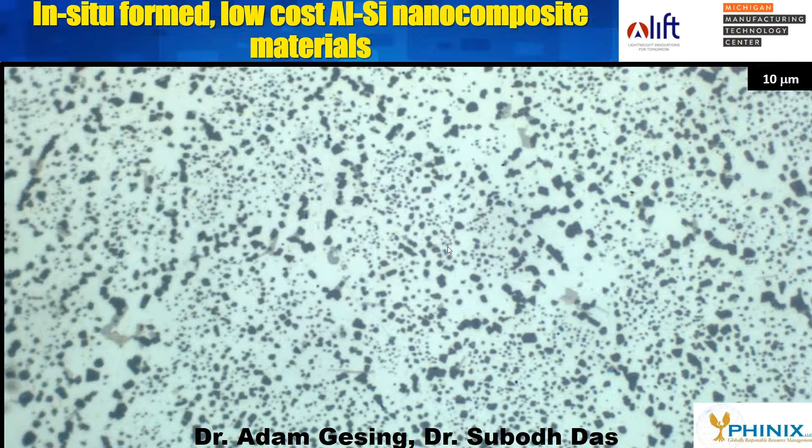Artificial aging-strengthened aluminum superalloys. This new light metal composite is net-shaped form by high-pressure die casting with the potential to reduce mass by 40% and to reduce cost by 20%.

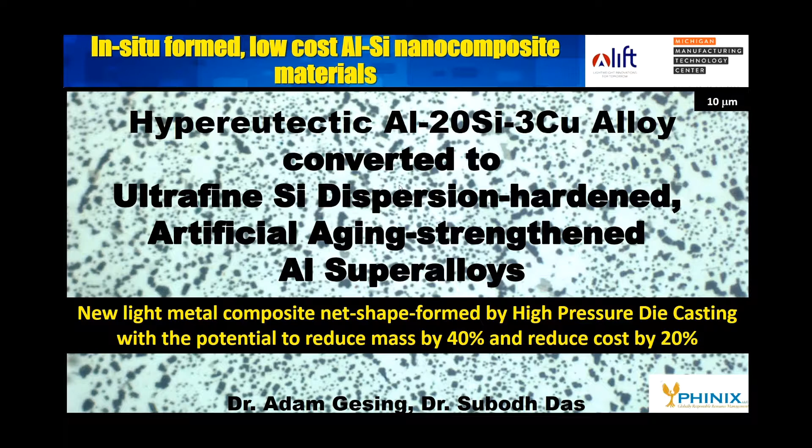A little bit of background: the aluminum silicon alloys are the bread and butter of the aluminum foundry industry and are being cast at an annual rate of over 2 million tons per year in North America for use mainly in transportation. However, the coarse microstructure of these alloys limits their specific mechanical properties and their potential for vehicle lightweighting.

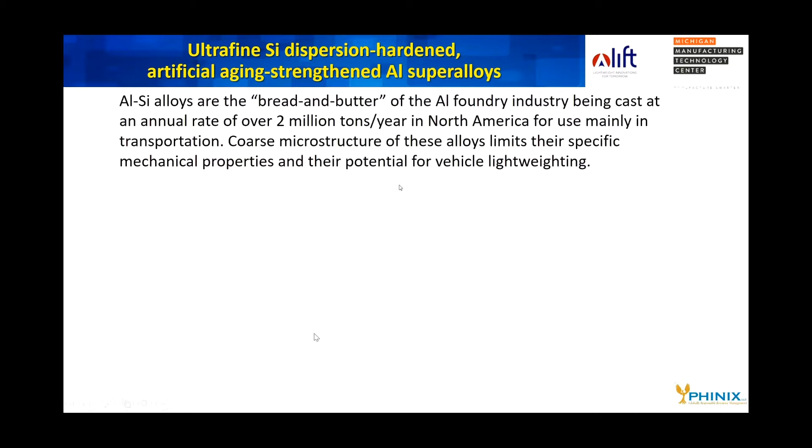A new development of a cast aluminum alloy produced in situ formed nanocomposites of up to 25 volume% of submicron equiaxed silicon particles in an aluminum matrix that can be left ductile or can be reinforced by nanoscale spinodal precipitates.

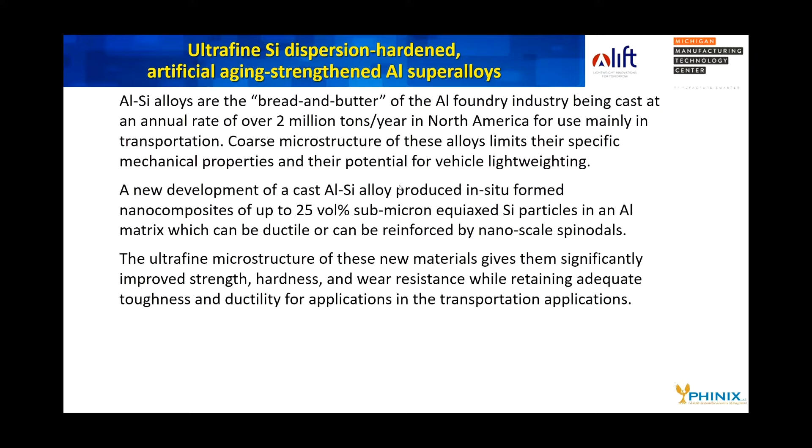The ultrafine microstructures of these new materials give them significantly improved strength, hardness, and wear resistance, while retaining adequate toughness and ductility for application in transportation. These materials are produced by conventional casting techniques, including continuous strip casting and high-pressure die casting.

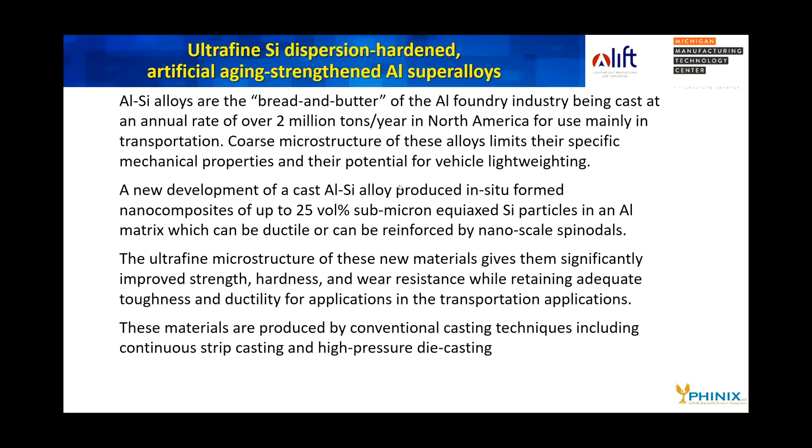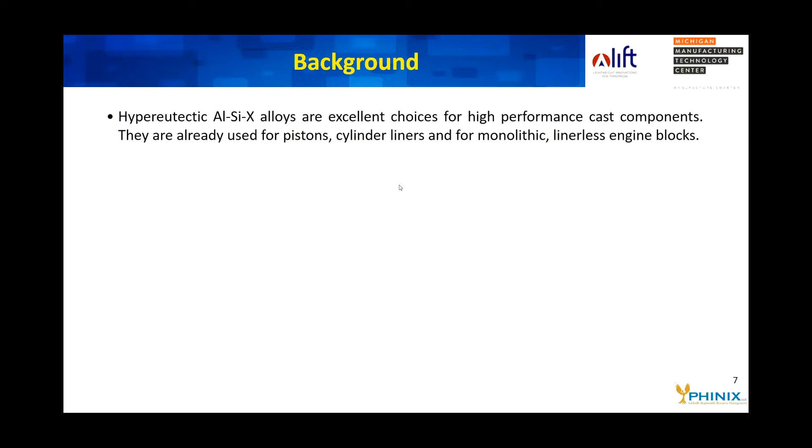Some background: the hypereutectic aluminum silicon alloys with other additives are excellent choices for high-performance cast components. They are already used for pistons, cylinder liners, and for monolithic linerless engine blocks. The high silicon minimizes the thermal expansion coefficient, and improves the alloy's thermal conductivity by almost 3 times in comparison with cast iron.

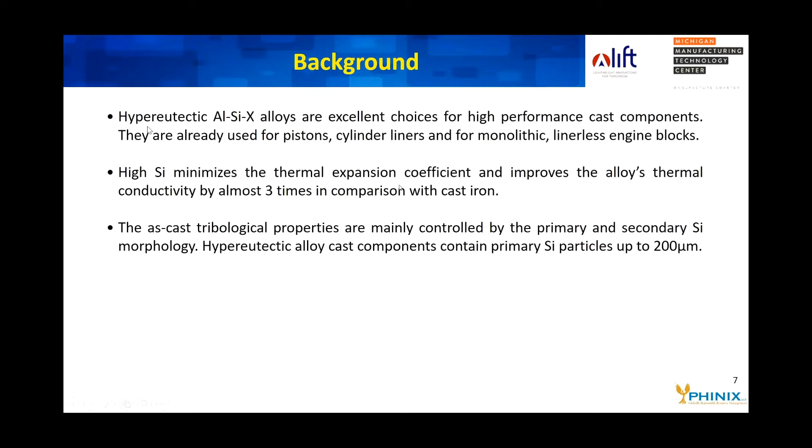As-cast tribological properties are mainly controlled by primary and secondary silicon morphology, but the hypereutectic cast components on the market now contain primary particles of up to 200 microns, and agglomerations of those particles lead to critical flaws that limit their application for strength-critical applications. The industry demands significant reduction of primary and secondary silicon size for improvement of the component's mechanical properties.

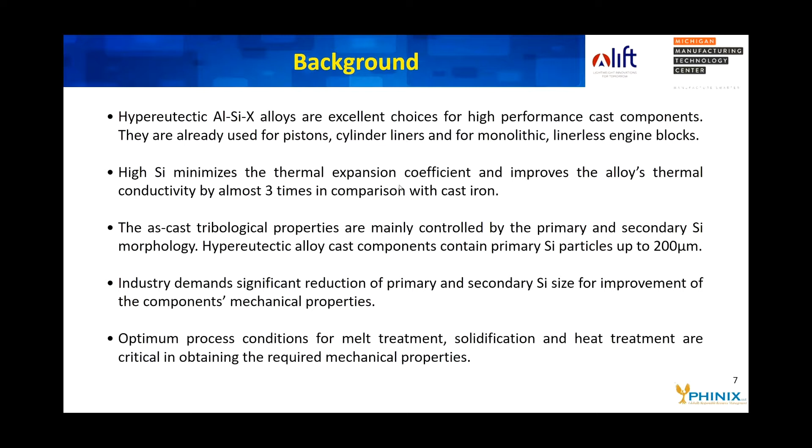Optimum process conditions for melt treatment, solidification, and heat treatment are critical in obtaining the required mechanical properties. An example of the use of such a hypereutectic alloy is A390 alloy used in the engine block of a Yamaha Majesty motorcycle. It is formed by high pressure die casting, in which the metal is poured into a dosing hole of a shot sleeve and then injected into the die cavity by the injection plunger.

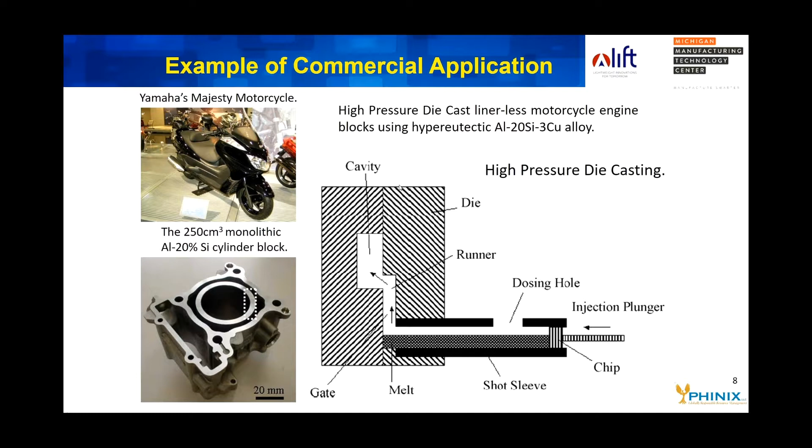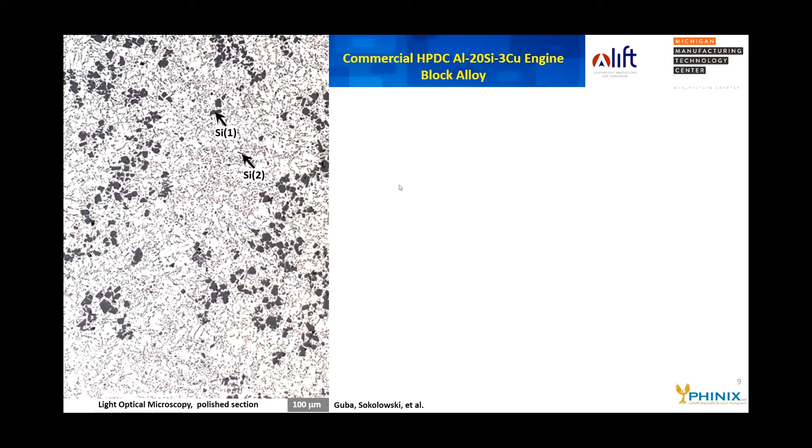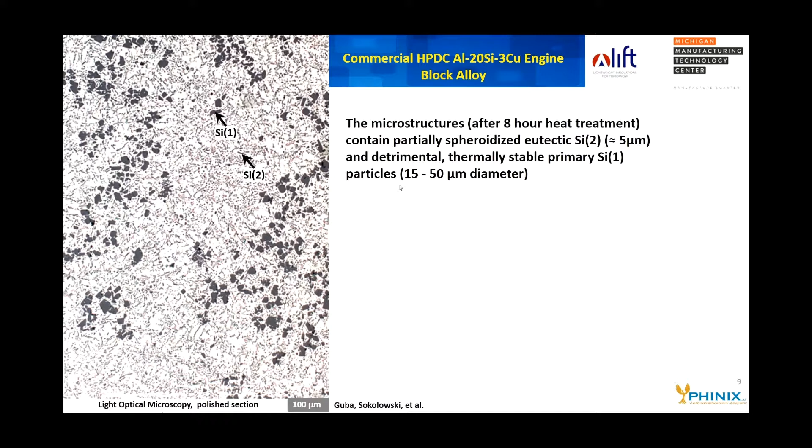The microstructure that results is shown here. It is already heat treated, and it is dominated by large primary silicon particles and partially spheroidized secondary silicon particles. The secondary silicon particles are about 5 microns diameter, and the primary particles are 15 to 50 microns diameter, but their non-uniform distribution creates critical flaws that are over a millimeter, and that limits the fracture strength of such a commercial alloy.

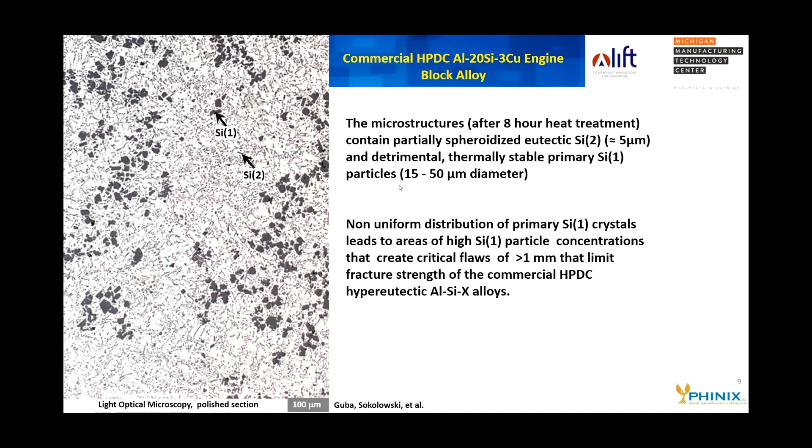There has been a lot of study on how to modify this primary silicon distribution and size, and here we show the effect of the melt holding temperature and the cooling rate, average solidification rate, on that distribution. The slowly cooled material at top left, at 735 degrees and 1.3 degrees a second, contains large primary silicons and large plates of secondary silicon, and those plates are 250 to 500 microns in diameter and have a thickness of about 5 to 10 microns.

Both the primary and secondary silicons can form an interconnected network, and that helps crack propagation through the material. The commercial engine block we're discussing has a microstructure that lies at a reasonably high melt temperature and die casting cooling rate of about 35 degrees, or average solidification rate of about 35 degrees a second.

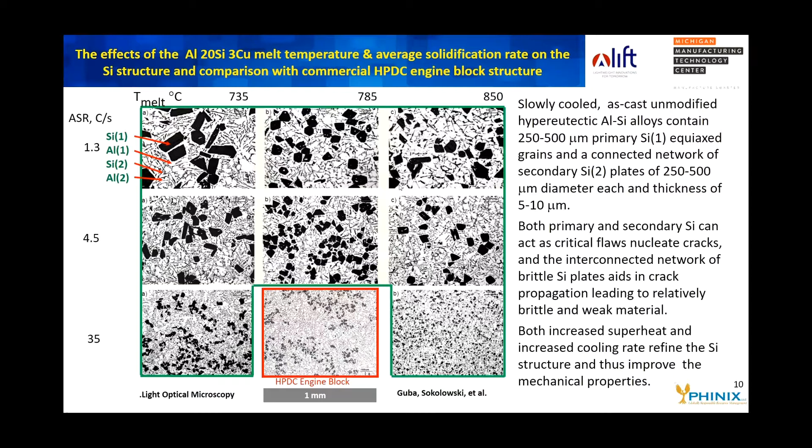It has already been optimized for that application by the manufacturer. Both the high melt temperature and high solidification rate refine the structure and improve the mechanical properties. There's a question of how to improve it more, and there has been a lot of work done on this.

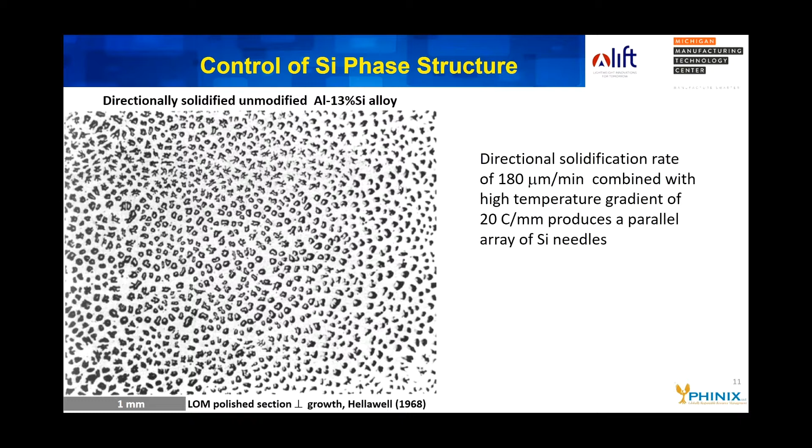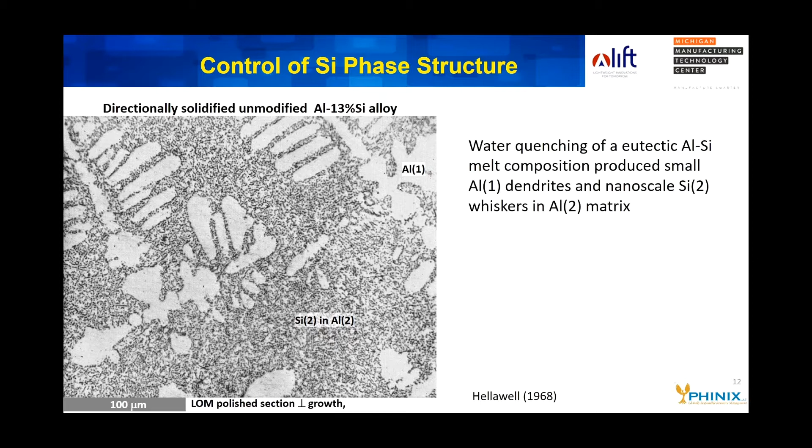Now, it is very difficult to control while water quenching, so people add modifiers to change and control the silicon morphology. The modifiers are usually either alkalis like sodium or potassium, or alkaline earths where strontium is most used. Those are surface active elements that modify the interfacial surface energy of the melt and the silicon, and also interfere with the growth mechanisms for the silicon structures.

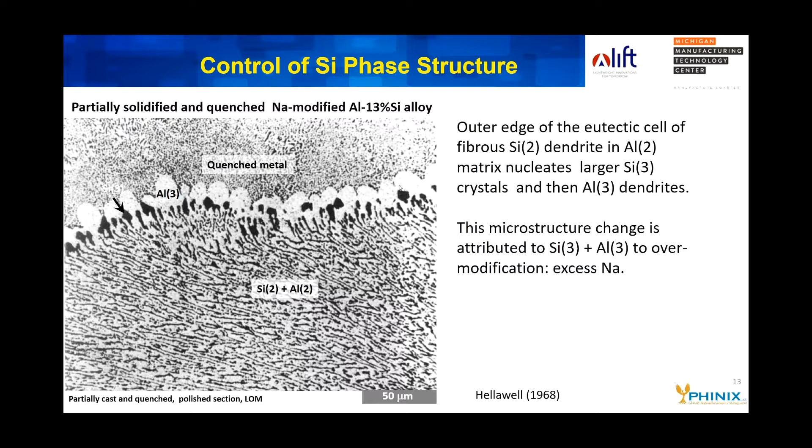In this particular case, the modified structure is in the form of a very fibrous silicon dendrite with submicron fiber diameter. On quenching, it was shown that the outer part contains coarser Si3 particles and aluminum dendrites on the outer edge. Hellawell, who did the work, attributed those coarser particles forming later, and the aluminum dendrites, to over-modification, i.e. too much sodium added to the structure.

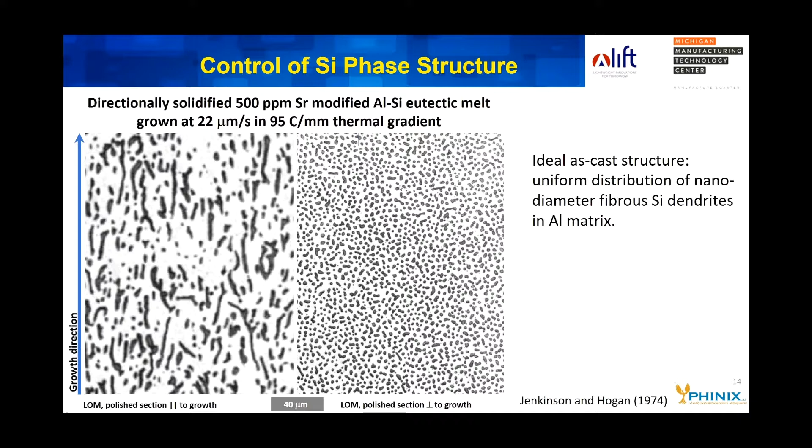That type of structure in aluminum in a binary alloy results in very hard silicon particles in a pretty pure ductile aluminum matrix. This aluminum matrix can be further strengthened by artificial aging if you add elements to the alloy that can form spinodal precipitates.

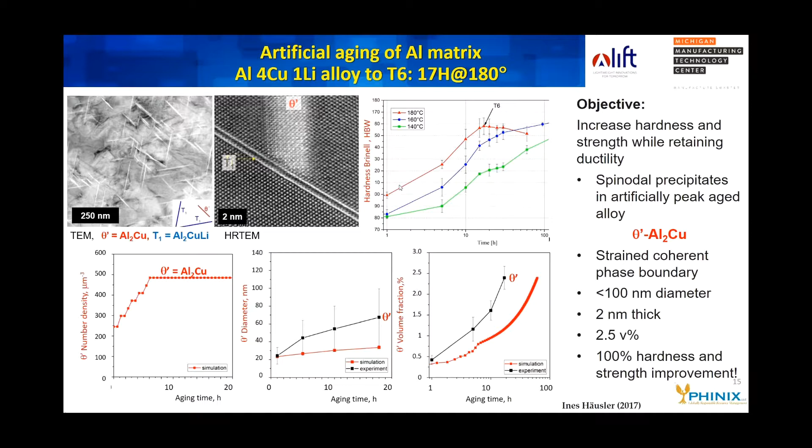However, because the interface between theta prime and the aluminum is coherent, and there is a certain mismatch in the lattice spacing, there is a very large coherency strain, and this coherency strain improves both hardness and strength. In the top right graph, we can see Brinell hardness increasing from the starting value of about 80 to about 160 at peak hardness, and that also represents the potential increase in strength if there are no other critical flaws in the material.

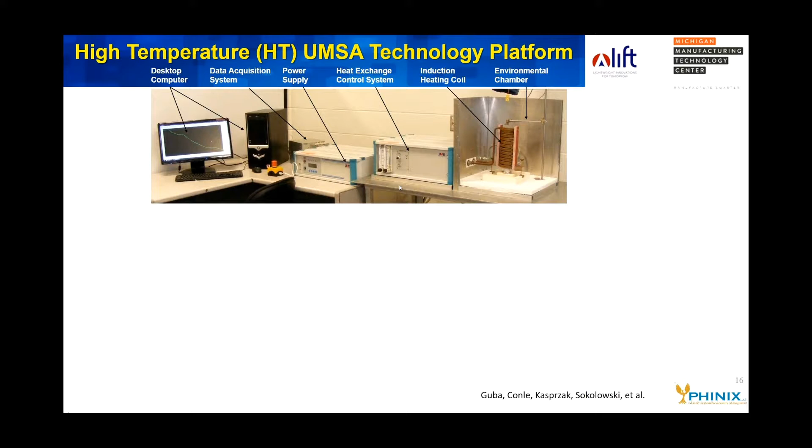For most of the rest of the talk, I'm going to be talking about the work done on the development of our nanocomposites by the group at the University of Windsor, led by Professor Sokołowski, who developed a universal metallurgical simulation analysis platform shown in the picture, which allows you to melt the sample using an induction coil, then control the cooling at any rate, and log the cooling during solidification and heat treatment. So the physical simulation can do melting, melt treatment, solidification, quenching, and heat treatment.

And the analysis has a comprehensive thermal analysis that is done on that. This particular apparatus can heat the metal to 1500 degrees. It can use samples of up to 200 milliliters, and can cool those samples at a rate of up to 30 degrees a second.

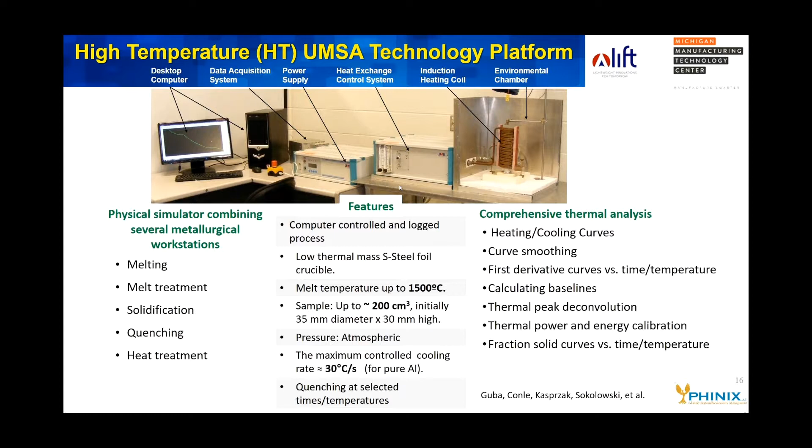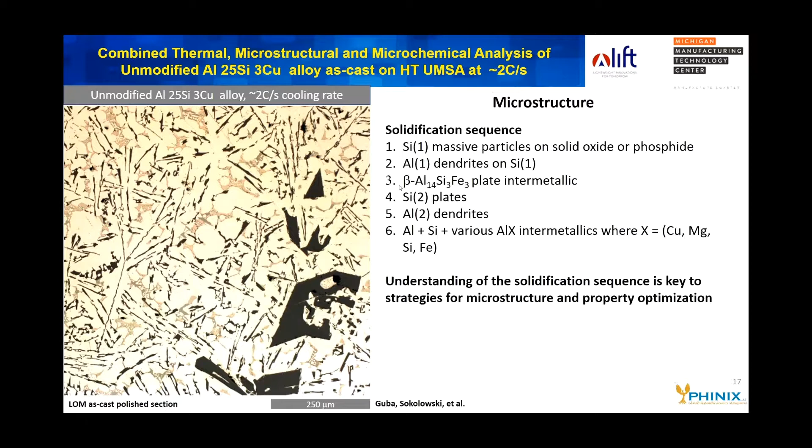So here is the thermal data that corresponds to this microstructure. Graph A shows the cooling curve, and you can correlate it with the formation of the particular phases in that cooling sequence that I just talked about.

The cooling curve is difficult to read. If you differentiate it and look at the cooling rate and draw in the baseline, you can see the thermal peak associated with phase formation much more clearly. And a finer analysis shown in figures C and D allows you to deconvolute the convoluted cooling curve into the individual thermal events.

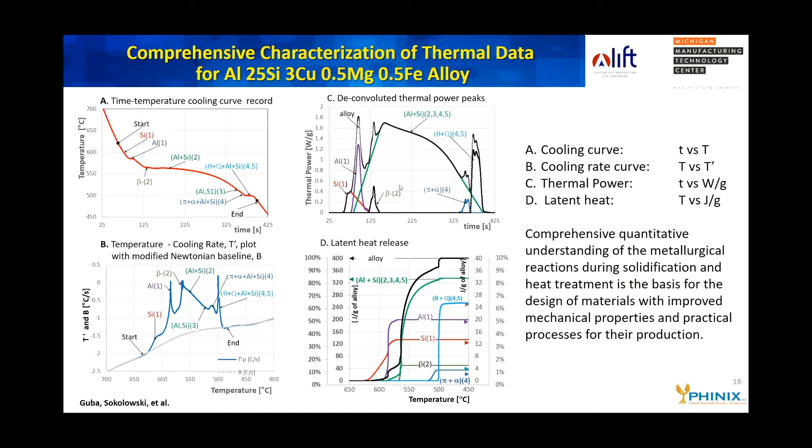Picture D shows you how those are then related to the latent heat release from each one of those phases. So again, this comprehensive quantitative understanding is key to the work to develop something with the microstructure that you want.

To get the samples that I'm going to show you, we needed to also control the pressure. In this case, the UMSA platform was mounted in the mechanical testing frame with the melting furnace right under the plunger, and there is a high pressure die underneath that. The metal is melted in the furnace and pushed by the plunger into the high pressure die.

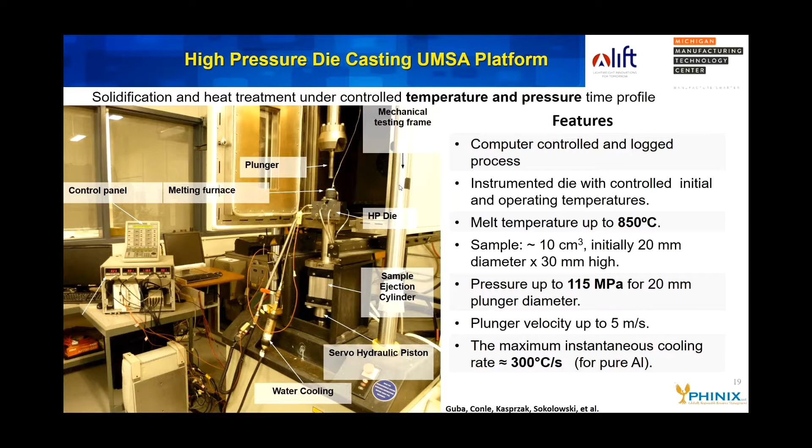So in this particular phase, this apparatus can get up to 850 degrees centigrade. The sample is about 10 cubic centimeters, and a pressure of up to 115 megapascals can be applied. And if you're injecting into a cold die, the maximum instantaneous cooling rate can be up to 300 degrees a second.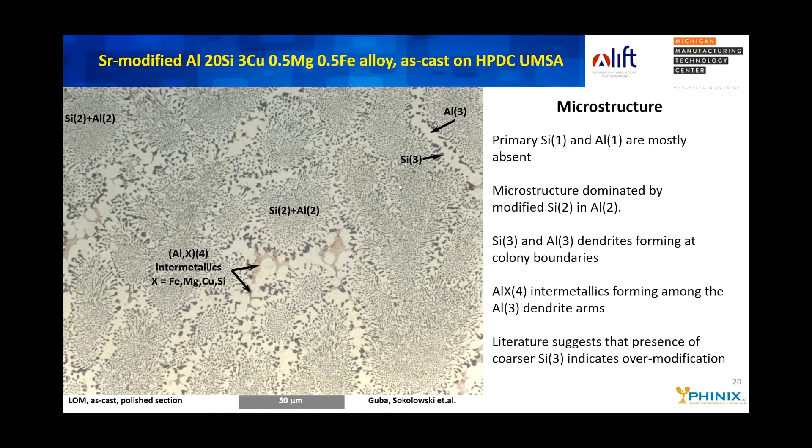Those silicon 2 whiskers form in colonies, which we call sea star colonies, which we'll see why in a second. At the boundaries in between those colonies, we find slightly larger Si3 crystals and Al3 dendrites, very reminiscent of what Hellawell was showing for sodium modified material. The intermetallics then form again in between the aluminum dendrite arms at the cell boundaries. So again, we are hoping that those Si3 materials are due to over-modification, as the literature suggests.

Here is a picture made by backscatter electron on the scanning electron microscope. This is a very low magnification, and you can see that there are spherical colonies, which in section look like sea stars. So I call them sea star colonies.

The white material in the picture is bright because it contains copper and reflects, or backscatters, the electrons well. So you can see that the copper intermetallics form continuous bridges through the material at the colony boundaries. However, the interior structure of the sea star colonies, the Al2 and Si2, account for more than 90% of the material. Even at this low magnification, one does not see either primary aluminum or primary silicon.

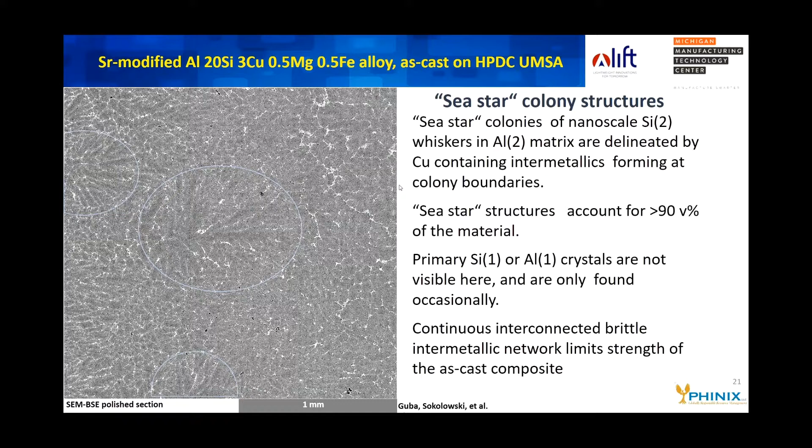One would think that the interconnecting continuous brittle network would be bad news, because in this form, as-cast, it limits the strength of the as-cast composite.

Now we deep etched the material to reveal a little bit more of the structure, and again you can see that the intermetallics are now standing proud of the surface and really show up the microstructure.

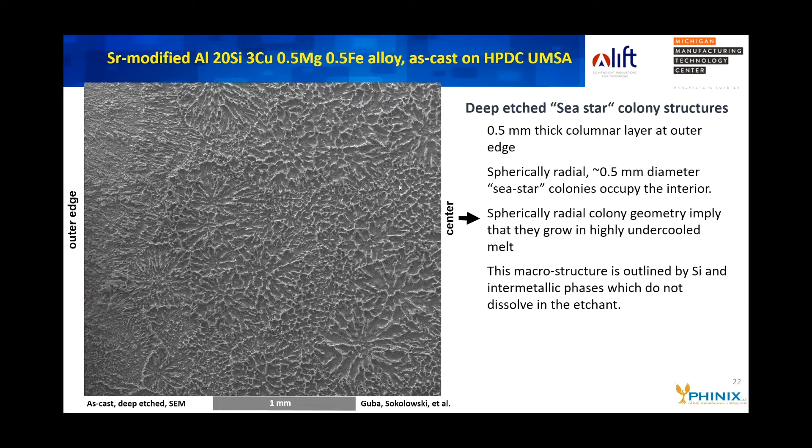On the left-hand side you have the outer edge of the sample, with columnar growth going into the sample for about half a millimeter, and for the rest of the sample you have spherical colonies - spherical sea star colonies are the main structures.

This is at higher magnifications, showing one of those sea star colonies, and you can see here the inside of the dendrite arm, and now you can see whiskers that are there.

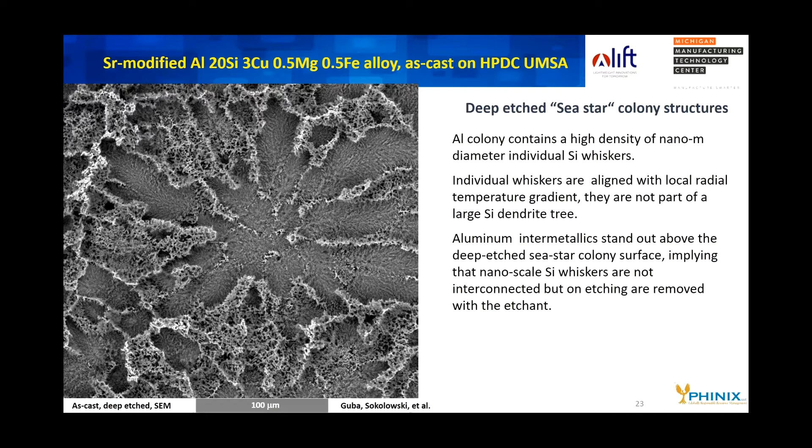The interesting part is that they're etched down, and that implies the whiskers are not interconnected dendrites, but individual whiskers which are etched out and removed with the acid etchant.

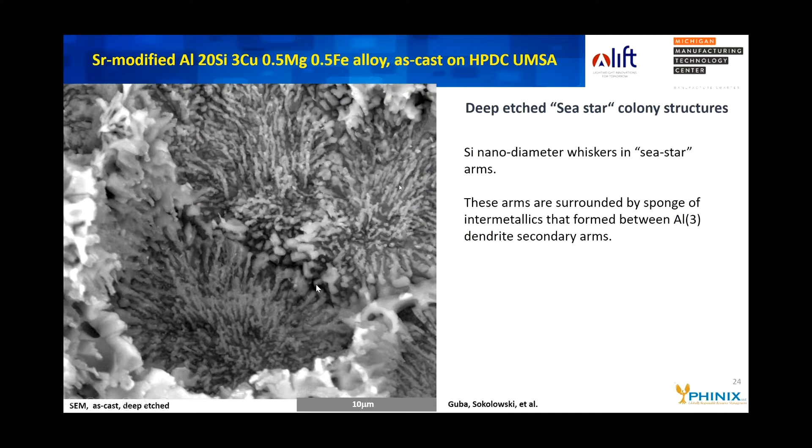So this is a higher picture of the nanoscale whiskers inside of the arm and the copper intermetallics at the cell boundaries.

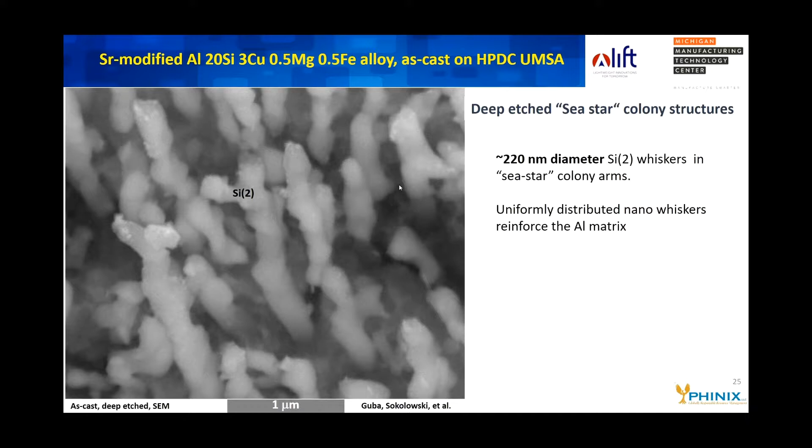And this is a picture of the whiskers, with the micron marker at the bottom. You can see that they're about 220 nanometers average diameter and quite long, and also very uniformly distributed inside that sea star colony structure.

If you section and polish the section through this sea star colony arm, you can see that there are not only silicon whiskers there, but also some very small fragments of intermetallics, also less than 500 nanometers in size.

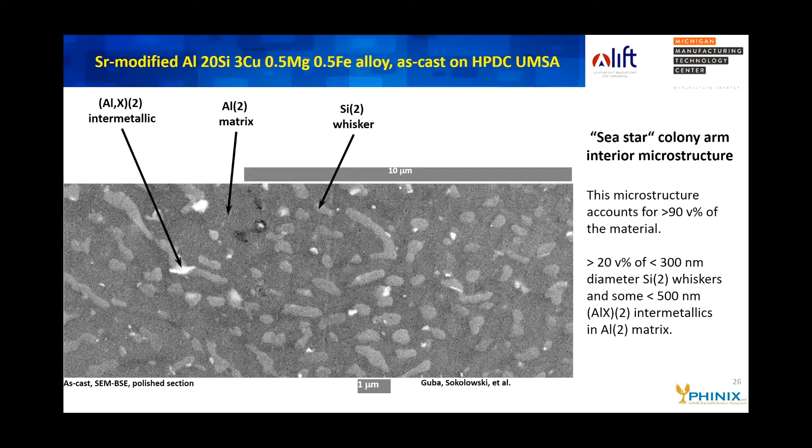The key point here is that this structure dominates the volume of the entire material, accounting for about 90% of the volume, and the rest is the colony boundaries.

So we have a structure which is very promising, but we have to improve its ductility by getting rid of the continuous network of brittle intermetallics.

How do we do it? We give it a short, about 10 minutes, temperature hold near the maximum temperature of stability of aluminum plus silicon in the phase diagram.

This is below the silicon solvus surface, but it is above the aluminum silicon copper intermetallic solvus surface.

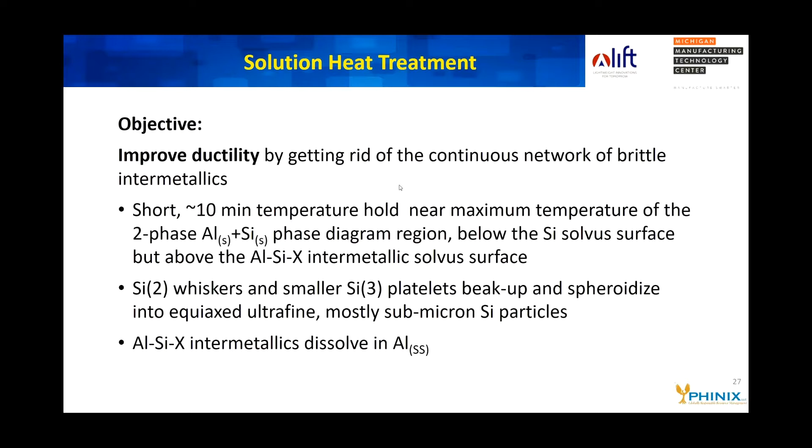So what happens is that silicon whiskers and the smaller Si3 platelets break up and spheroidize into ultrafine, still mostly submicron silicon particles. The aluminum intermetallics mostly dissolve in the aluminum to form an aluminum solid solution matrix.

So here is a comparison between as-cast and solution treated structure. You can see that the aluminum now is a solid solution matrix that contains most of the copper, and the intermetallics are mostly gone, dissolved in the aluminum solid solution.

The silicon 2 has coarsened, but it is still mostly about 500 nanometers. The little larger Si3 platelets at the grain boundaries...

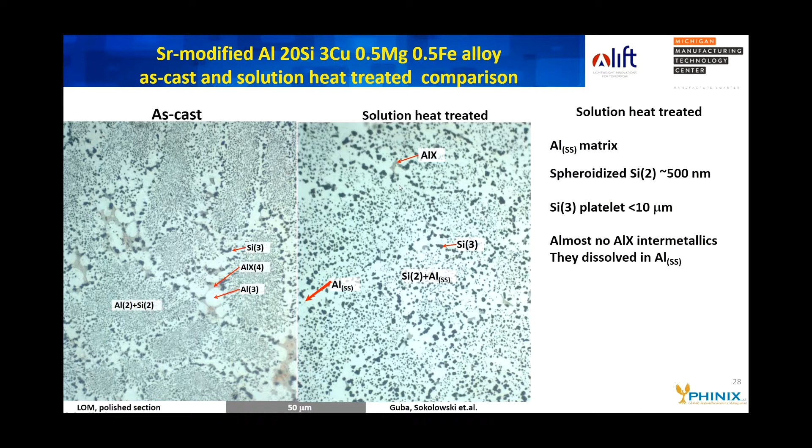Sometimes spheroidize, sometimes stay as platelets, but they're still less than 10 microns, and they're isolated from each other rather than forming networks.

So in a deep-etched scanning electron picture, you can now see that where you used to have the colony boundaries, you can still find some silicon-3 platelets, but they're typically less than 10 microns.

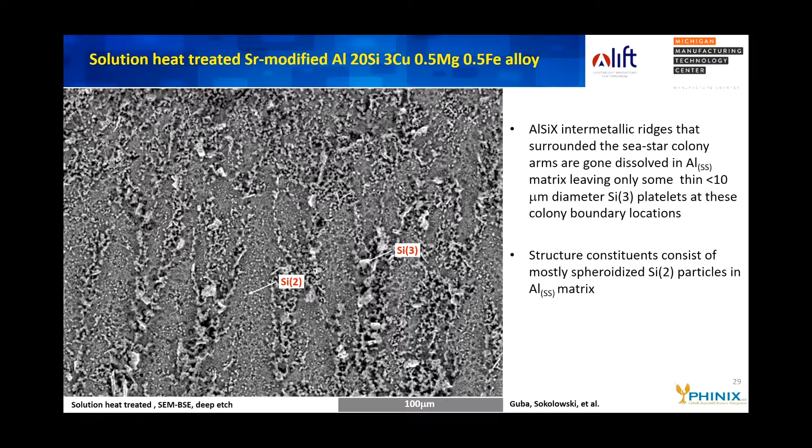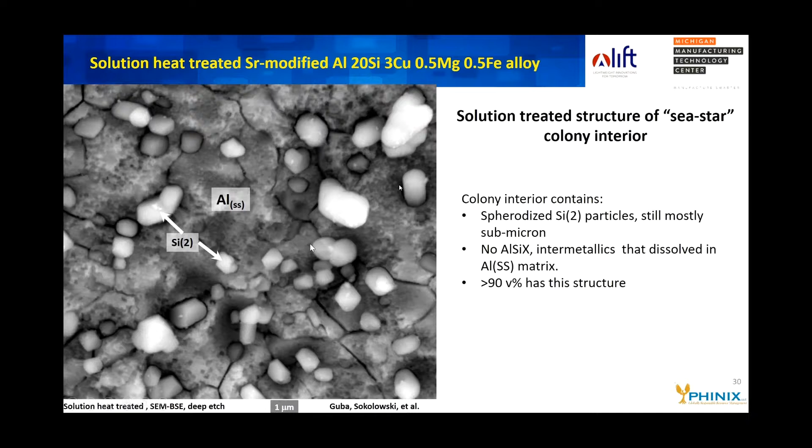And the Si2 in the colony arms are still sub-micron. Here is a higher picture of those sub-micron spheroidized silicon particles in the colony arm.

So if we now compare the structure of the sample produced on the high pressure die casting UMSA to what is commercial in the Yamaha engine block, you can see that the largest particle at the lower magnifications in the UMSA sample are about 10 microns.

Whereas in the Yamaha engine blocks, those are agglomerates over 100 microns, which concentrate into even larger flaws.

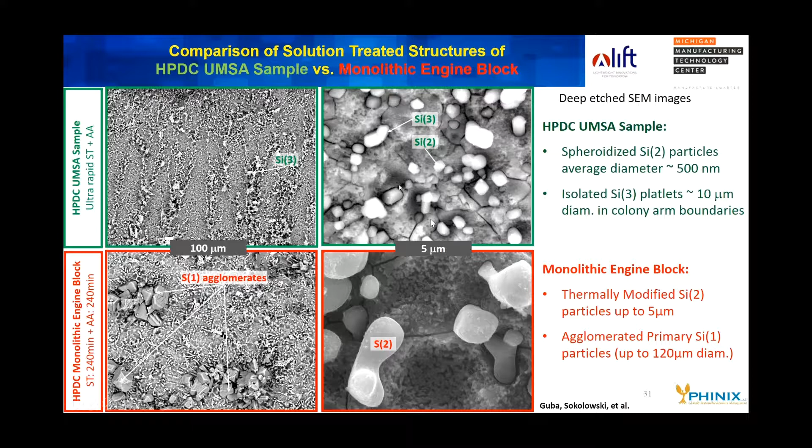Looking at the secondary silicon, long thermal treatment of the engine block partially spheroidized those, but they're around 5 microns, whereas short treatment of our nanocomposites managed to spheroidize the particles without getting them too much above 500 nanometers.

Now, we already talked about other people artificially aging to strengthen the material. To do that, we now have, after solution treatment, a supersaturated aluminum solution with about 4% copper in it, because we took the silicon out of an aluminum 3% copper alloy.

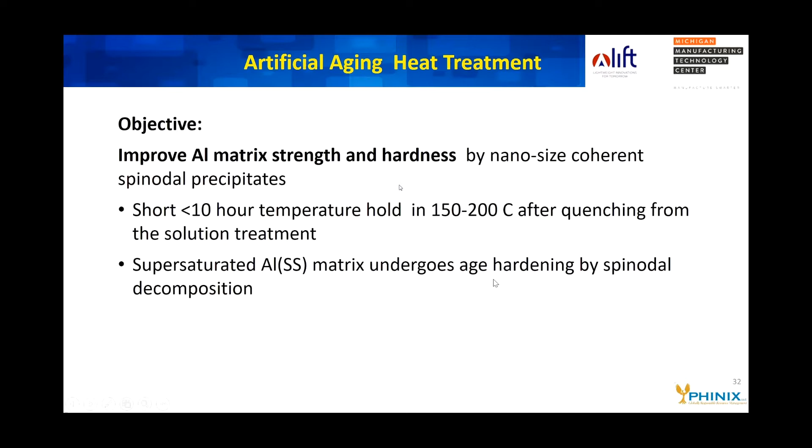In this particular case, artificially aging means a temperature hold at about 150 to 200 degrees centigrade, and one needs less than 10 hours to reach peak strength and peak hardness. So in this process, the supersaturated aluminum matrix undergoes age hardening by spinodal decomposition.

Here are pictures comparing the engine block and the UMSA solidified sample after artificial aging. You can see the silicon in purple, and the copper is in blue, and theta prime nanoscale precipitates are barely visible in the aluminum matrix, but they are there, and they contribute to the hardness of the matrix after artificial aging.

In the engine block, which had a much longer aging treatment and solution treatment, the theta precipitates are significantly bigger, and there are also still undissolved large intermetallic particles that contain copper, magnesium, silicon, and aluminum, copper, and iron. The silicon particles, again in purple, are now over 5 microns.

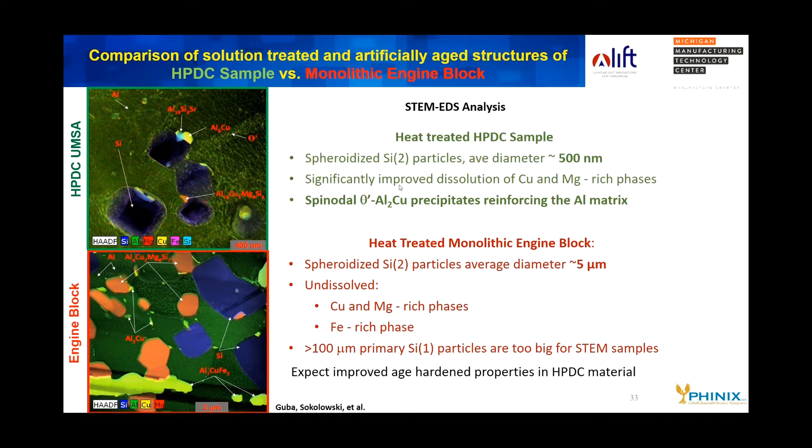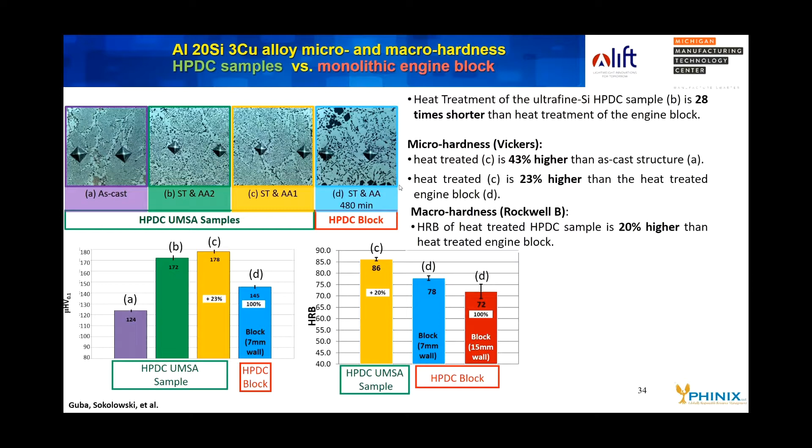If you look at the macro hardness, this is a Rockwell B hardness. The Rockwell B hardness for the artificially aged sample C is 20% more than the block material for the thicker portion of the wall. You can also see that even for the commercial material, hardness depends on the cooling rate, since thinner portions of the wall are harder than thicker portions. So you have improved hardness at 7 millimeters and 15, but the new material is 20% harder than the commercial material.

Now, tensile test samples are still to be produced, but engineers often use an approximate empirical linear correlation between a macro hardness measurement and a potential tensile strength of metal alloys.

If you look at our Rockwell B measurements of 72 and 86, they would compare to a potential tensile strength—potential because it requires that there are no other reasons for degrading the strength—of between 435 and up to 570 megapascals. Now, 570 megapascals is the domain of automotive and aerospace aircraft alloys such as 7000 series and 2000 series wrought alloys.

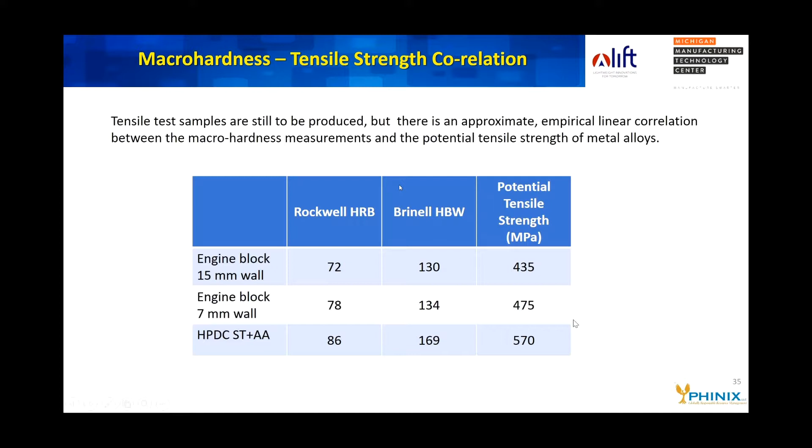If one looks at the wear of the samples, you can see here the groove depth in a reciprocated wear test. Looking at the wear, we're examining three cases: a strontium modified version of the alloy, but cast without pressure application.

The unmodified alloy cast in the high pressure die casting simulator, and then the modified nanostructured material as cast under pressure in UMSA. You can see that the as-cast material has 51% less wear than the non-pressurized melt. So making the material under high pressure die casting conditions is very much desired.

This is for as-cast material. After artificial aging, we would expect that the wear performance will be still better than what we're showing here.

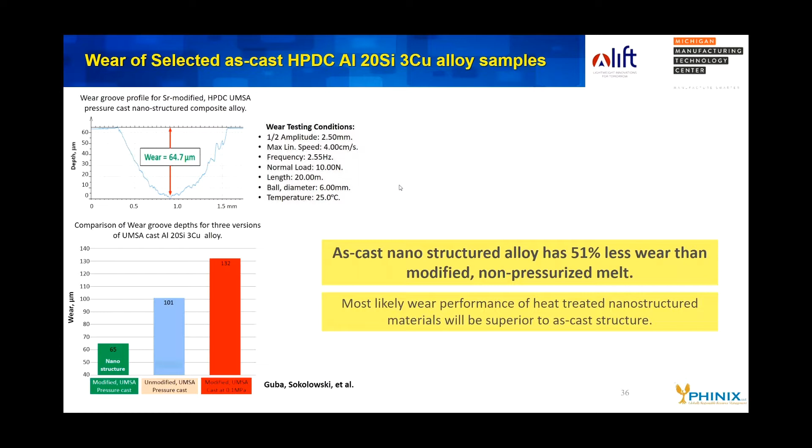So that's where the work stands on the laboratory scale, and Phinix is proposing a stage 4 proposal for lift, with the objective of improving specific mechanical material properties of aluminum-based alloys, including strength, hardness, and wear resistance, while retaining adequate toughness and ductility for property-critical transportation applications, by first processing industrial-grade aluminum-silicon-X hypereutectic alloys to generate novel as-cast nanostructures free of detrimental primary and secondary silicon.

Second, a short solution treatment generating nano and ultrafine nodular silicon particles uniformly distributed in the aluminum solid solution matrix. And third, optimum addition of minor alloying elements, which we label X, maybe copper, magnesium, or zinc, that modify matrix properties through spinodal decomposition of the supersaturated aluminum solid solution and solid state precipitation of nanoscale coherent spinodal precipitates during artificial aging.

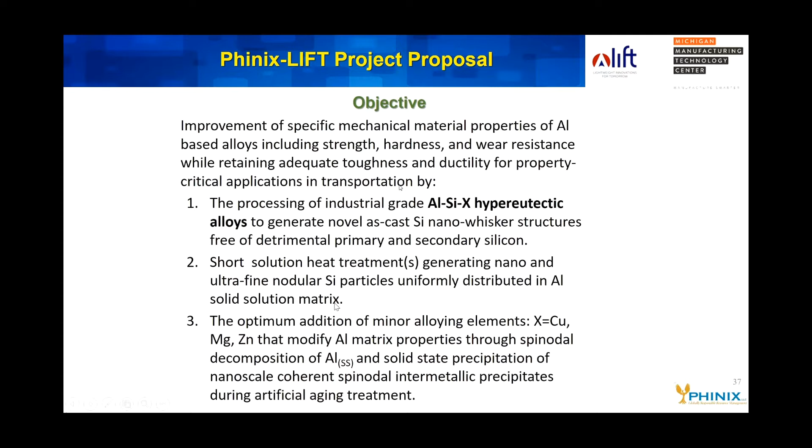This is our target—material that has already been achieved on the lab scale. It is 26 volume percent pretty uniformly distributed ultrafine silicon, with a little bit of isolated residual intermetallic. There is also 2.5 volume percent of nano-size spinodal precipitates in the aluminum matrix, strengthening the whole thing.

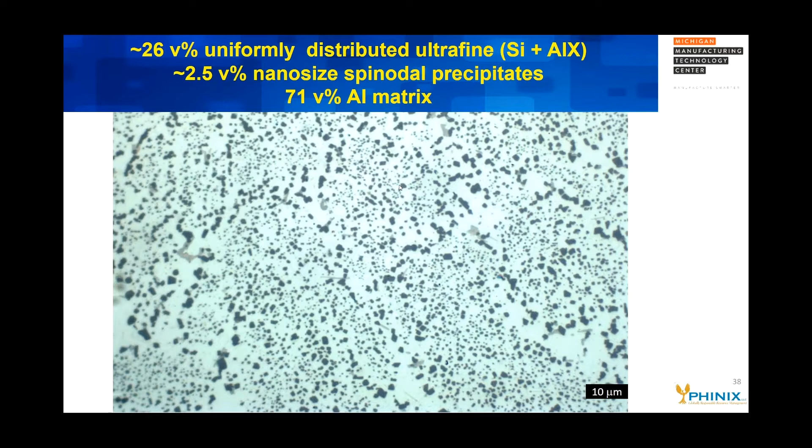What are the potential applications of such a thing? Well, it depends on which advantage you want to take advantage of.

HP die casting can make thin-walled, complex net shape parts, leading to parts consolidation, which is useful in aerospace for housings, seat frames, instrument panels, and the same for automotive.

One can take advantage of high hardness and low wear, useful in latches and hinges in aerospace, which can have very complex shapes. In automotive, where engines are a little less temperature critical, this chemistry is already used for pistons and cylinder liners.

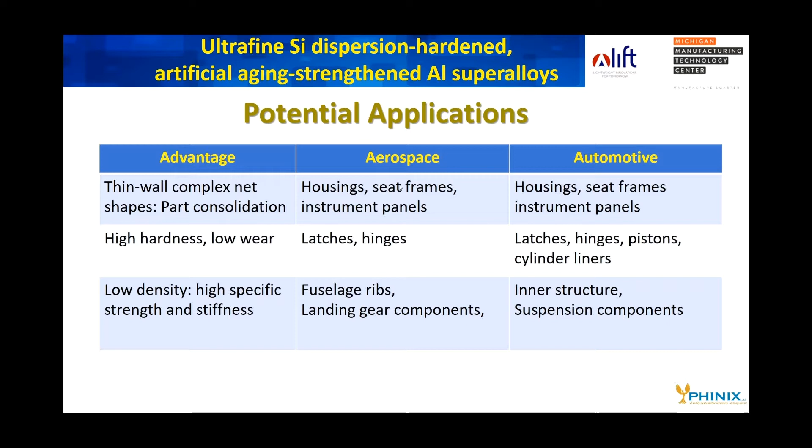One can take advantage of low density for high specific strength and stiffness, using this type of material as stiffening ribs or landing gear components. In automotive, the inner structure of the automobile and suspension components can be some targets.

This process flow sheet for this type of process is pretty well totally standard: melting, alloying, melt treatment, modifying addition, casting, and heat treatment. There's nothing magic or difficult about any one of the process steps.

That makes it a low cost, low risk process, allowing us to target significant improvement in specific mechanical properties without significant increase in component costs. Further, the starting materials, aluminum and the alloying elements, are all abundant and readily available, and can actually be sourced in many cases from secondary recycled sources.

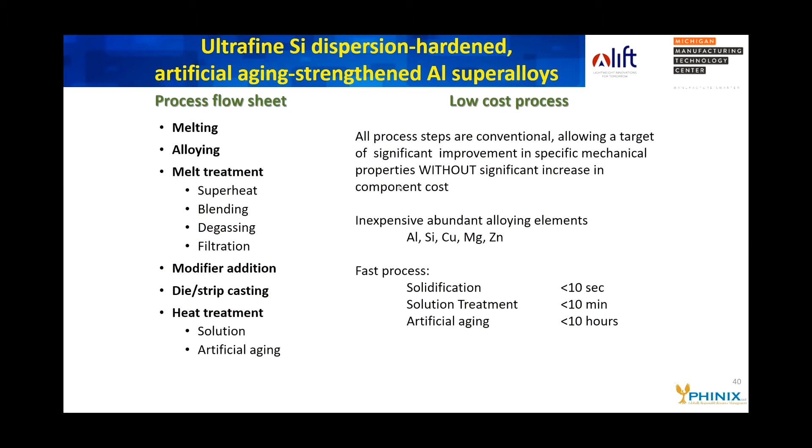The process is fast. Solidification takes less than 10 seconds, solution treatment less than 10 minutes, and artificial aging less than 10 hours. That gives us potential for a very low cost process, for material that can be recycled back into A390 alloy, and that can be batched from recycled materials.

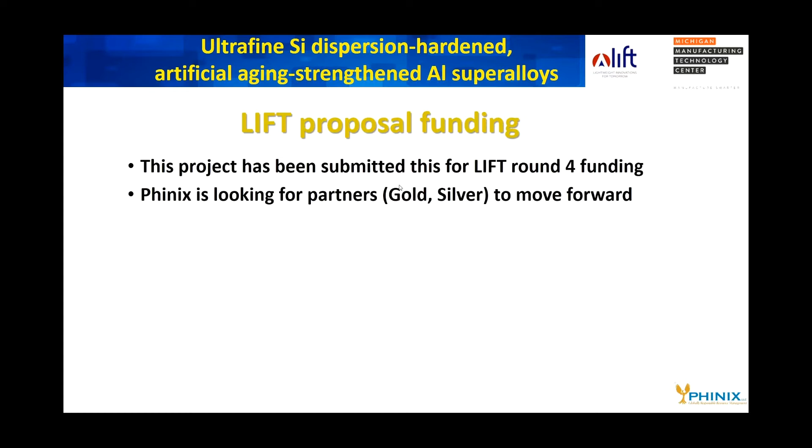So we have the stage set for a proposal submitted to LIFT to work on this type of material, and Phinix is looking for partners at the gold or silver level to move forward with the project under the LIFT umbrella.